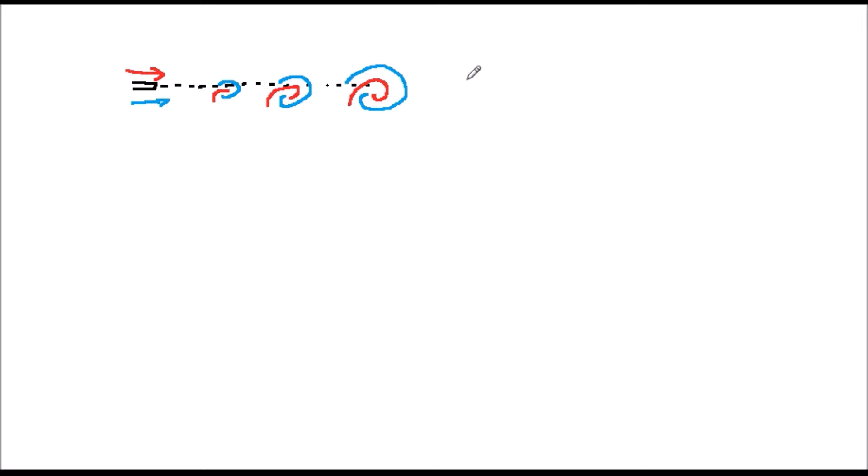In the last video, we saw how diffusion was the driving force behind mixing at the molecular level, but how turbulent phenomena helped by firstly allowing a larger surface contact area between the air and the fuel, secondly by facilitating a greater concentration gradient, which speeds up diffusion, and thirdly by allowing more time for mixing, since the fuel and the air are bulk mixed.

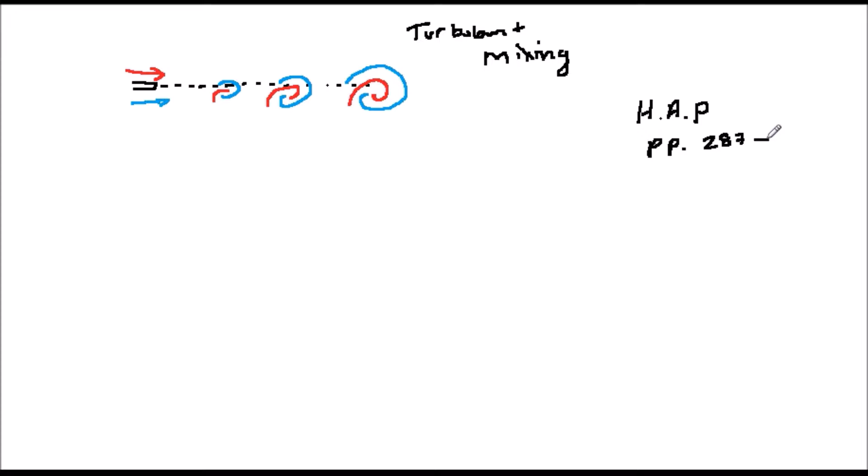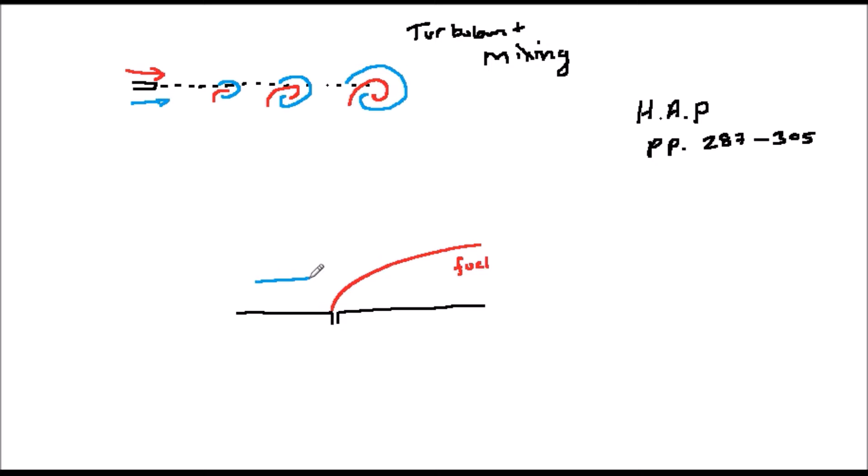An analysis of this from a theoretical point of view is quite involved. However, you can find it in the Hypersonic Airbreathing Propulsion book on page 287 to 305. A simple theoretical treatment indicates that turbulent flow improves mixing by 20 to 30 times. However, as we'll see, there are various practical and second order limitations which reduce this to more like an order of magnitude, that is around 10 times. And this seems to agree quite well with most of the measured figures which are available.

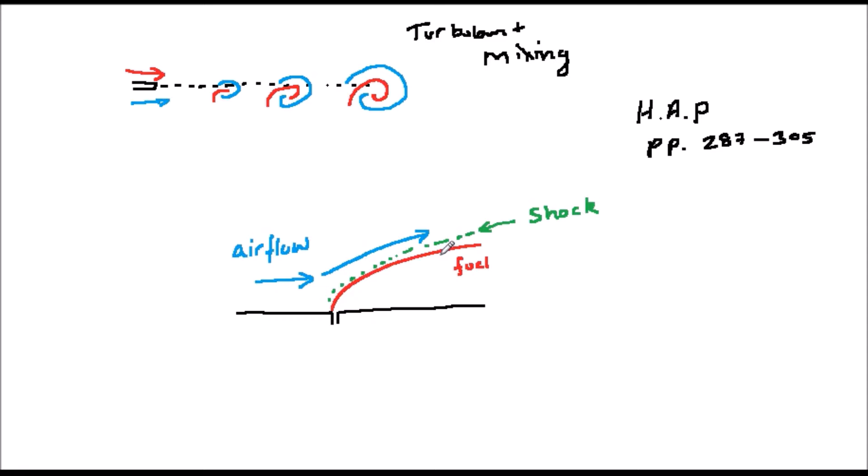One issue in particular is a problem. We've already seen in earlier videos how shock waves form. When fast flows hit obstacles, their component molecules don't have time to rearrange themselves and get out of the way. And so they end up forming a thin, hot, dense layer.

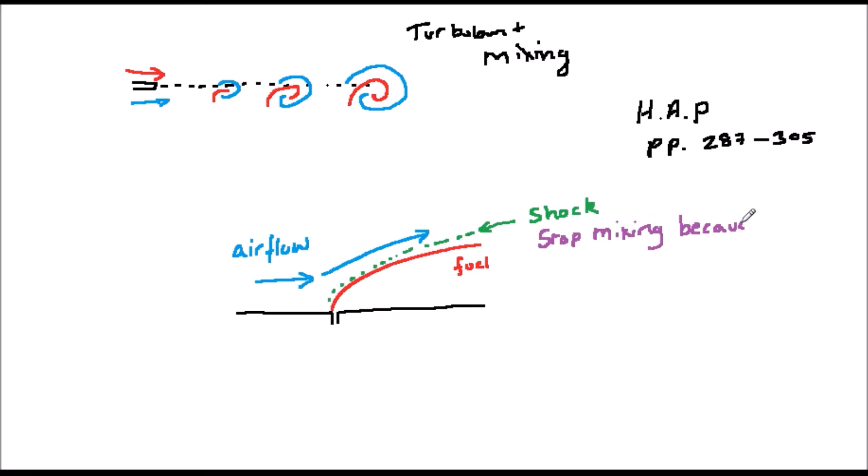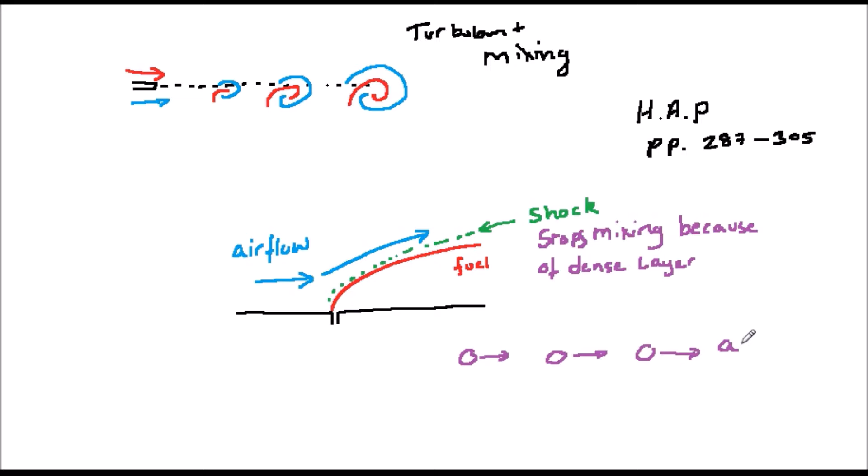Well, exactly the same thing happens if the fuel and the air are not moving at the same speed and they collide with each other. And as a result, the region of compression this time is a barrier to mixing because the air and fuel molecules find it difficult to cross this ultra-dense region.

Indeed, long before an actual shockwave forms, the mixing layer size drops. The reasons for this aren't immediately obvious, but they might be because of localised density increases or due to the relative velocity of the molecules as shown in the drawing.

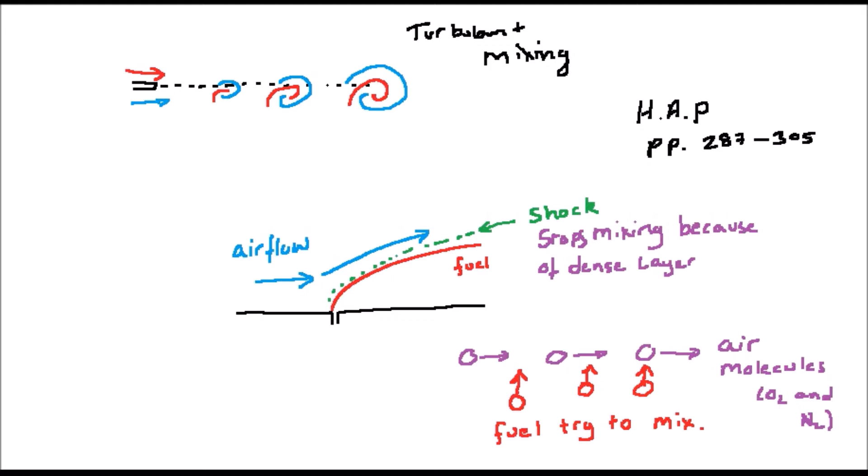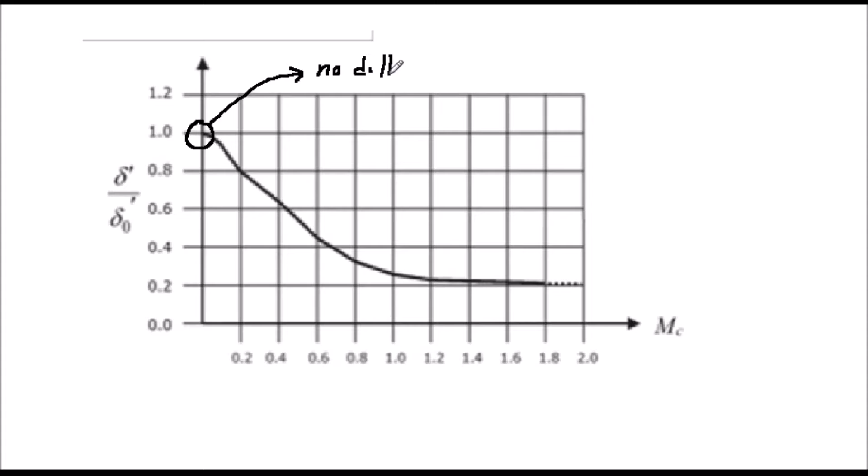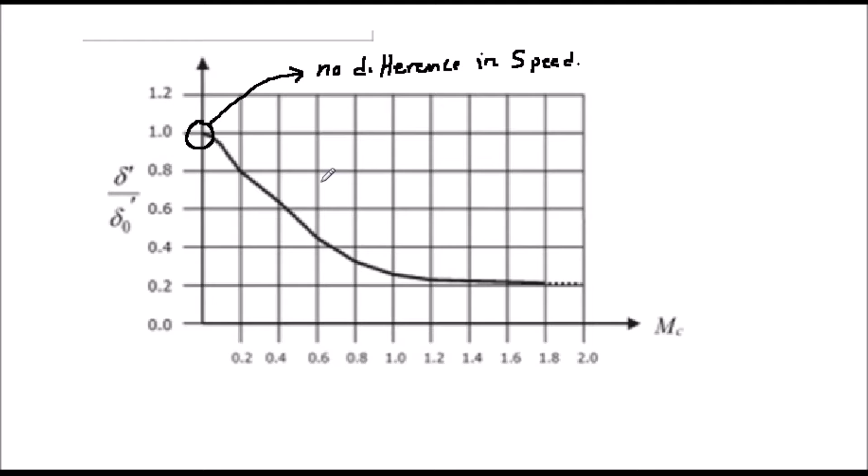A number of authors have done studies into this phenomenon, and perhaps Slessor is the most comprehensive. A graph produced from his survey is shown in the diagram. Here we can see that the mixing layer thickness starts to drop off almost immediately as the fuel and air move at different speeds. And by the time that the difference is Mach 0.2, the layer is only 0.8 of what it would have been had both components been moving at the same speed. At very large speed differences, it tends to only 1/5 of its original value.

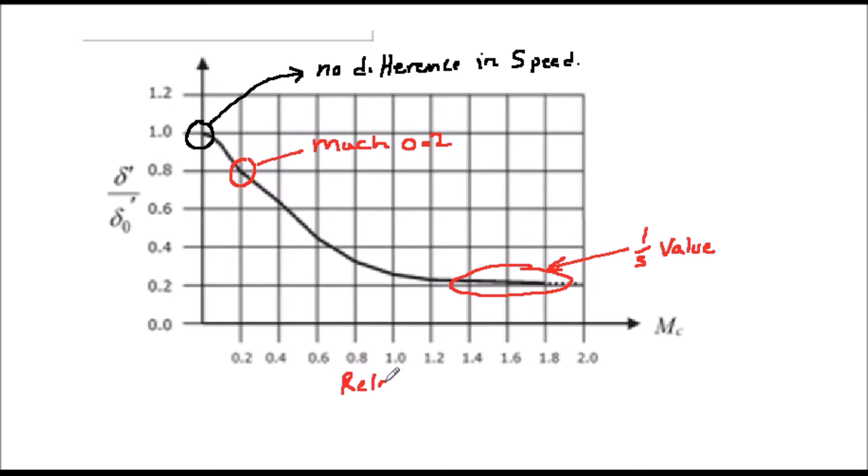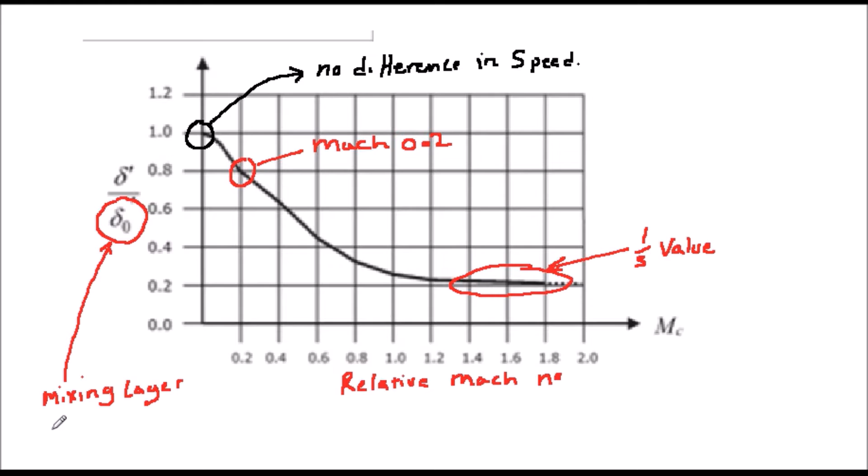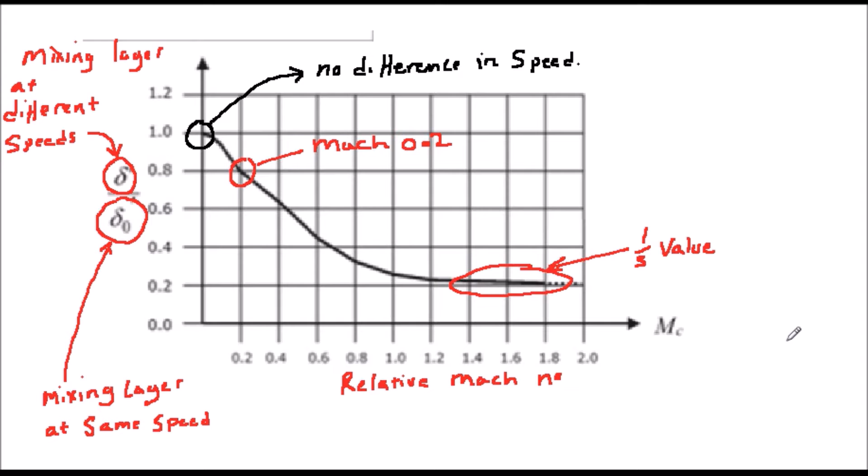And so this presents something of a dilemma, because to induce turbulence and ensure good bulk mixing quickly, we need a difference between air and fuel velocities. But this itself causes the issues with compressibility problems which we've just been describing. As stated previously, the measured figures seem to show that good turbulent mixing is around 10 times better than the plain simple diffusion alone. So let's look at what the actual figures for mixing look like.

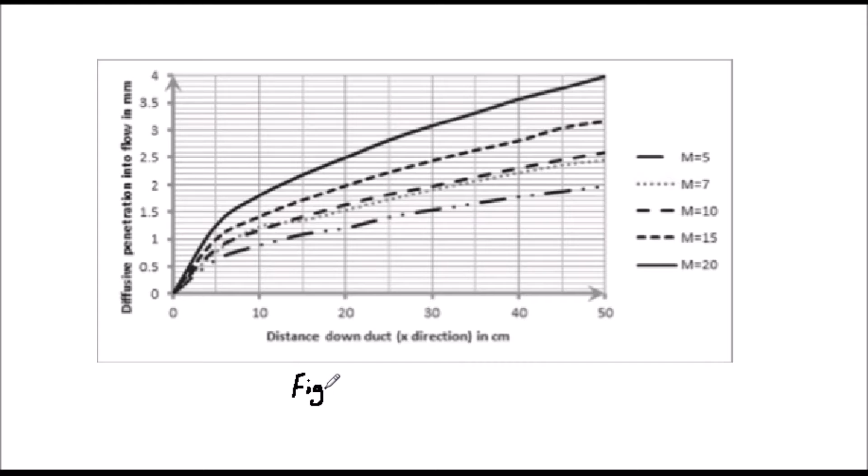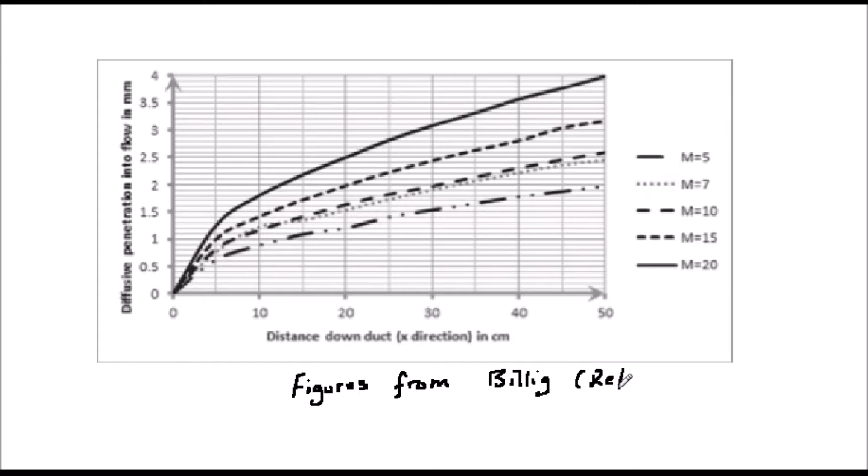The diagram below shows the mixing layer thicknesses in an engine at different Mach numbers. This is based on a famous design by Billig, which is a very typical published scramjet design. I'll include a reference to this and also some other useful standard figures in the video description below.

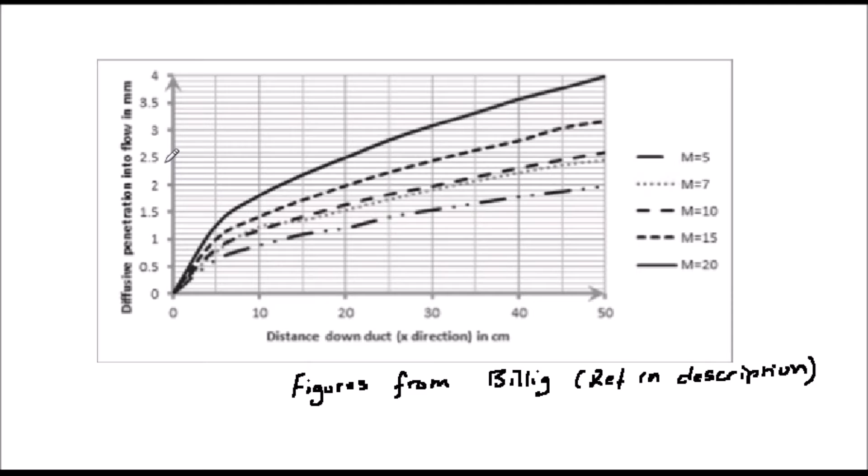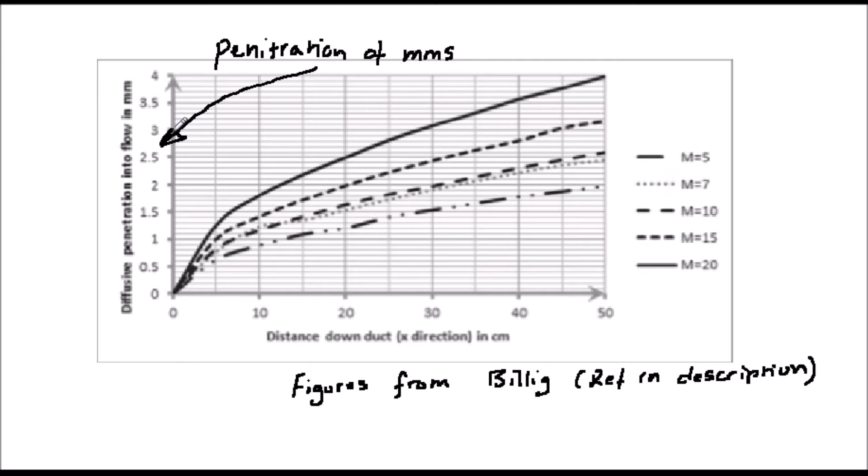Now remember that well-designed turbulent mixing can improve this figure by a factor of about 10, even including the compressibility effects. We can see therefore that using either injectors or some other way of placing the fuel, we still need to bring it into contact throughout the mixing volume within a few tens of millimeters for it to be fully and effectively mixed. This goes some way to explaining the lack of success of simple wall-mounted injectors.

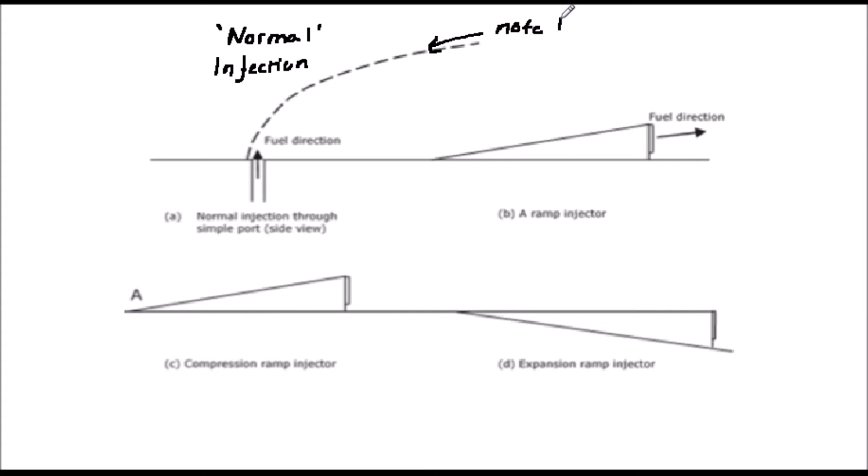So let's have a look at two types which are very often used. The first is a normal injector. These inject fuel at right angles to the flow, as shown in the diagram. Since the fuel speed here is 0 compared with the air in the direction of the duct, we would expect, and we would find, very low mixing in the initial contact area. As the fuel moves further down the duct, however, its speed increases and the situation improves.

A second type of common injector are ramp injectors. These are designed to inject the fuel in the direction of the airstream and therefore lessen the strength of the interface shock wave between the fuel and the air. There are two basic configurations of these, which are shown in the diagram.

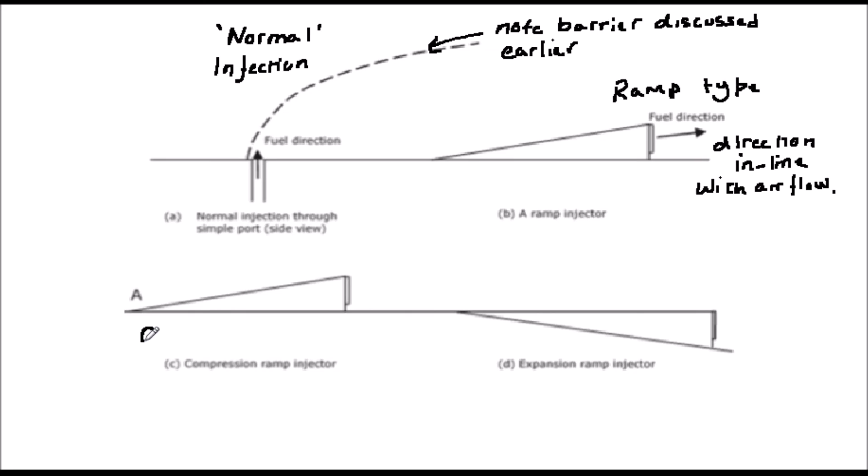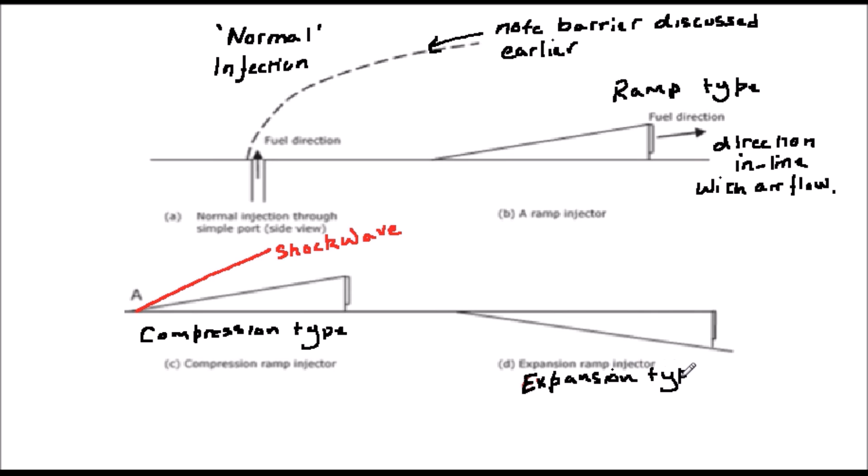Generally speaking, the expansion type seems to show better performance. Of course, there's a compromise here. The faster the fuel is injected, the smaller is the compressibility problem, but the further the fuel moves down the duct before mixing. The top of these injectors is often profiled to encourage turbulent mixing.

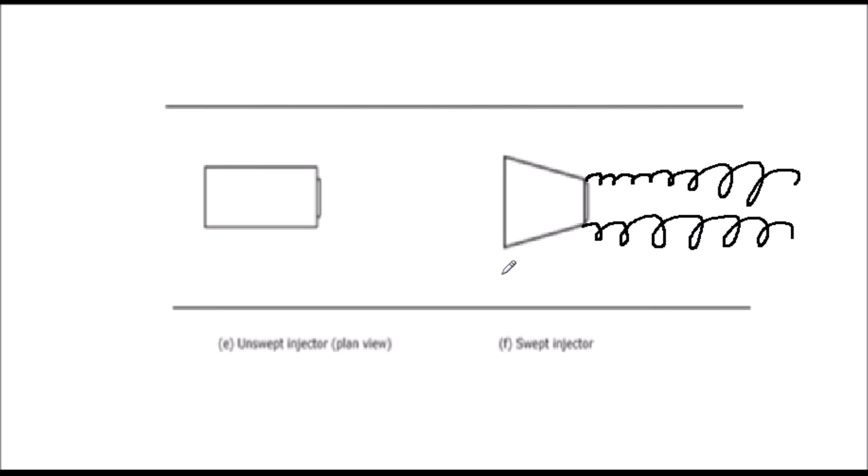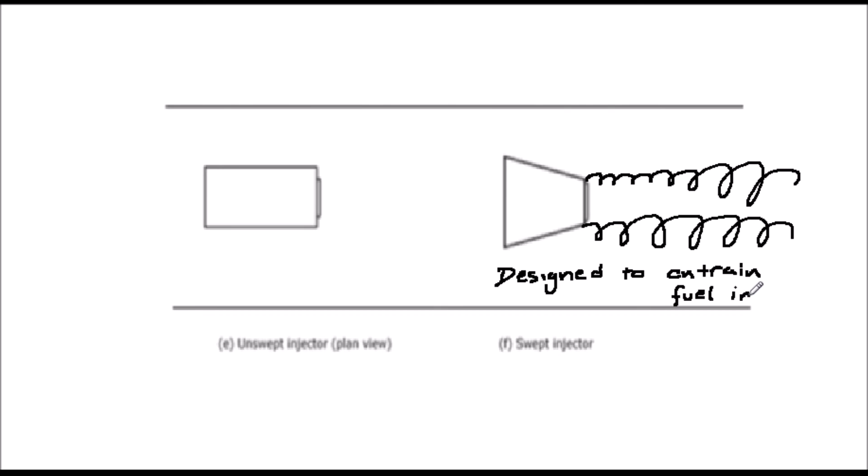In this case, encouraging the formation of vortices at the edges, which act like the instability discussed earlier. Other projections into the duct can also generate similar results. It should be obvious from this discussion that simple devices like the one shown above would have difficulty producing the necessary air-fuel contact. So we need to look at some other techniques, which we'll discuss in the next video.